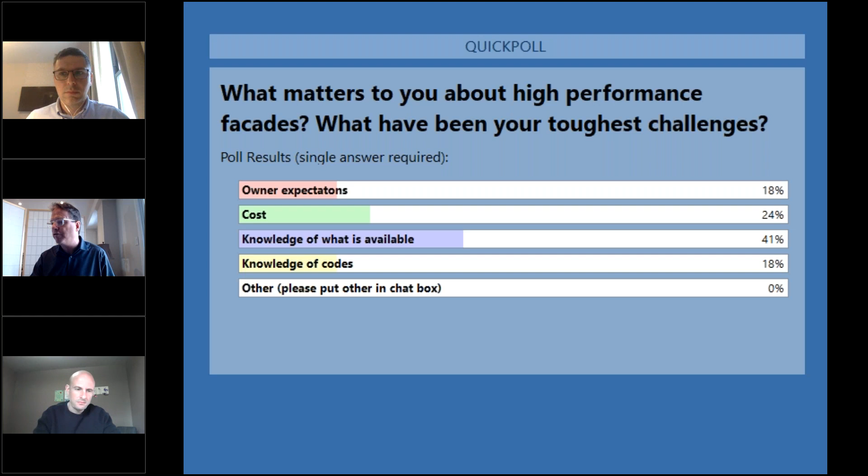18% knowledge of codes. And we're thinking in the future we might have a session about the codes. So think about that, and we'd be happy to receive your feedback on that topic later as well.

So with no further ado, I'm going to pull up Luiz's presentation, and does that show on the screen, guys? Yes, sir. Okay, great. Luiz, go ahead and just tell me when you want me to move the screen ahead. Perfect. Thank you, Blair. I'm just gonna turn off my camera. Okay, so next slide, please, Blair.

First of all, I just want to acknowledge that Passive House Canada acknowledges the ancestral and unceded territory of all Métis, Inuit, and First Nations people that call this land home.

Next slide, please, Blair. So as Blair introduced, my name is Luiz Bezerra. I'm a senior manager at Passive House Canada. I'm a certified Passive House designer, and I'm proud to say that I was the project manager of the first certified passive house in South America, in my hometown located in Brazil. So yeah, I'm Brazilian. Next slide, please, Blair.

Just to give you a quick introduction, who is Passive House Canada? We are a membership-based social enterprise that advocates for the high-performance international passive house standard. We do a lot of education and professional development and technical services, and our members, staff and structure are located all across Canada.

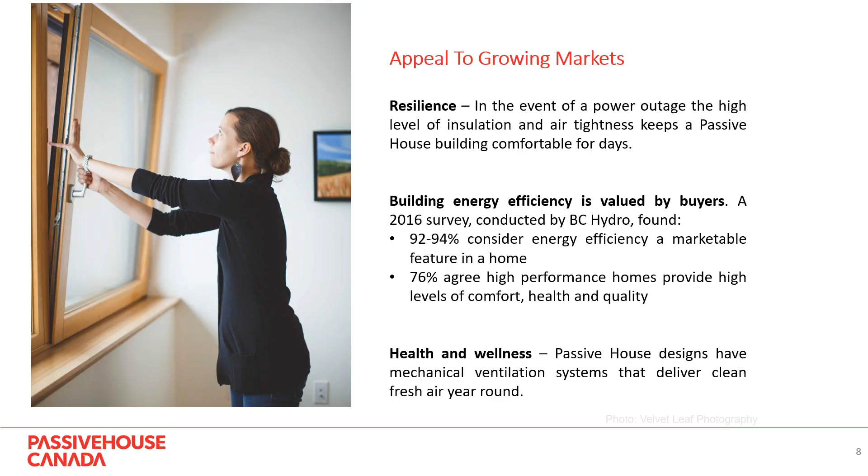So it's going to be hard for me to go in only 10 minutes to try to explain as much as I can about passive house. We do have a lot of education, as I mentioned before, but I'll just give you a high-level introduction to what is passive house. What do I need to know to build the passive house high-performance standard? Next slide, please, Blair.

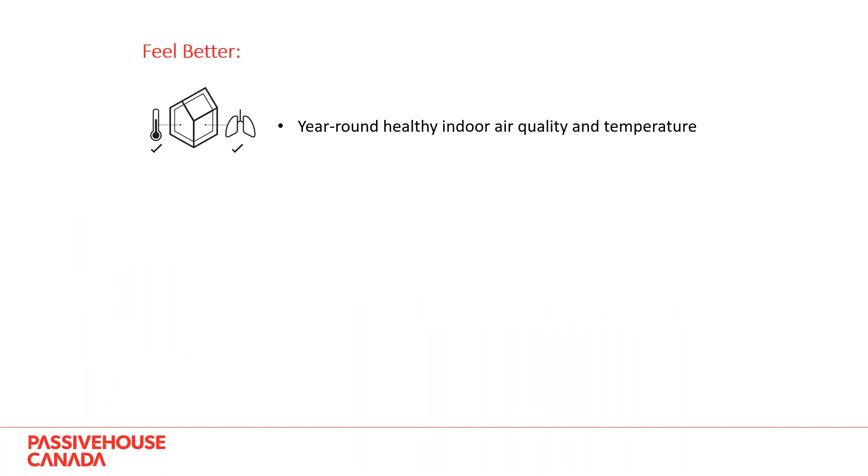You can click 5 times now. Thank you. So, feel better. This is one of our logos, to feel better, because what you have is year-round healthy indoor air quality and temperature. You're going to have your house always quiet and comfortable through the changing seasons. Substantial reduction in energy use and operating cost. On this one, I just want to note that depending on what code you're actually comparing to, you can have a 90% reduction on your costs.

It's very simple to use, and you have durable systems and priceless peace of mind, meaning that it doesn't matter if the government decides to put energy up or down, you're always going to have peace of mind that you're not going to be relying too much on that. Next slide, please.

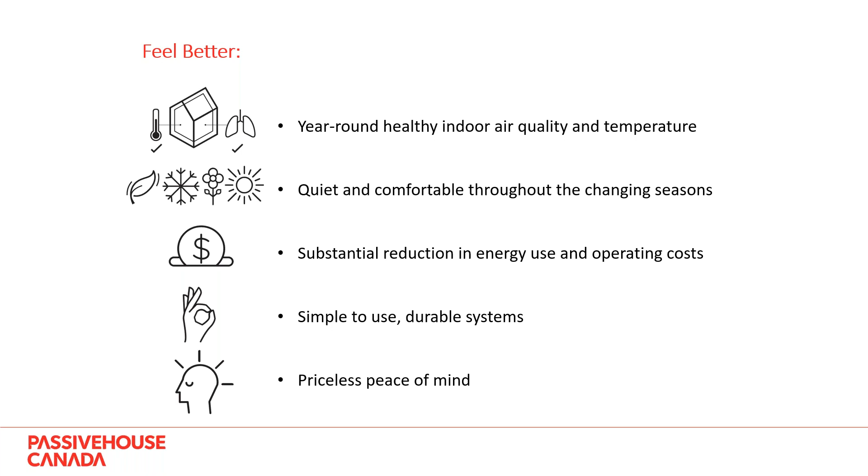So the passive house standard uses metrics. You might be asking yourself, what is the difference between passive house standard, LEED, and all the other green standards that you have so many of nowadays? What happens is passive house uses intensity metrics. It's very simple metrics to implement and compare, okay? And everything that you do has to go through the PHPP, which is the passive house planning package, where you energy model everything.

So just to give you a brief overview of what your targets are, you have to have an energy demand at most of 15 kilowatt hours per square meter per year on space heating demand. You have to have at the most 0.6 air changes per hour at 50 pascals, the airtightness, and you have the primary energy demand at 60 kilowatt hours per square meter per year. Next slide, please.

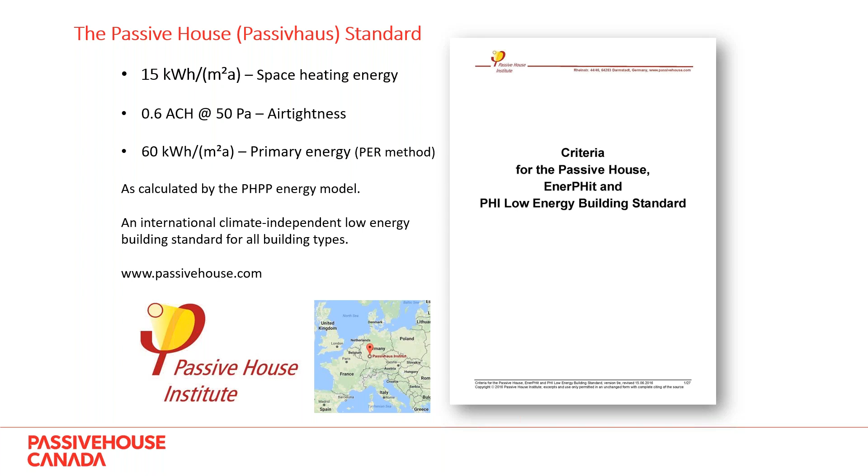So the key principles for you to be able to build a passive house are these ones in front of you. So we say that we have 5 pillars, right? Which is the super insulation. I like to say that super insulation would depend on the climate zone you are at. The second one is thermal bridge free design. You have to make sure that you don't have any undesirable thermal bridge in your buildings. You have to have high performance windows and facade, with good orientation. You have to have an airtight construction.

And with all that, you created a very insulated place. So for you to keep the air quality inside, you need a ventilation system with heat recovery. But there's a 6th one right there, which is form. So the design plays a huge deal when it comes to certification and making sure that you're going to be achieving the demand and the targets that passive house has. Next slide, please.

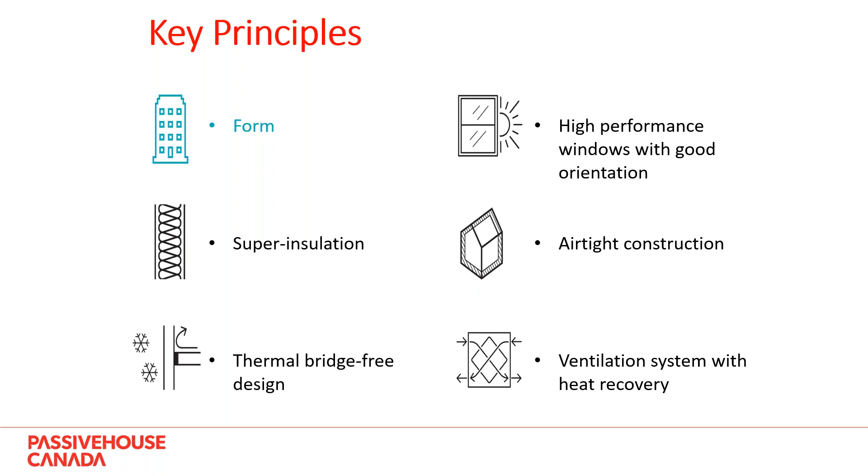So I'm going to talk briefly about the 5 pillars that I told you about. So you have to have continuous insulation. With that, you will reduce the heat losses in the winter, reduce the heat gains in the summer, and you're going to have a comfortable interior surface temperature. For some climates, R40 would work, but if you go to Alberta, Saskatchewan, Manitoba, the very cold climates in the north of Canada, you probably need a little bit more insulation.

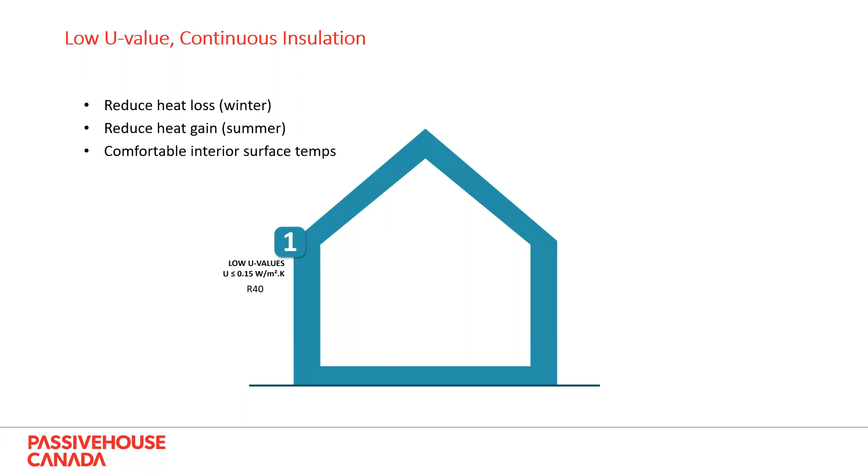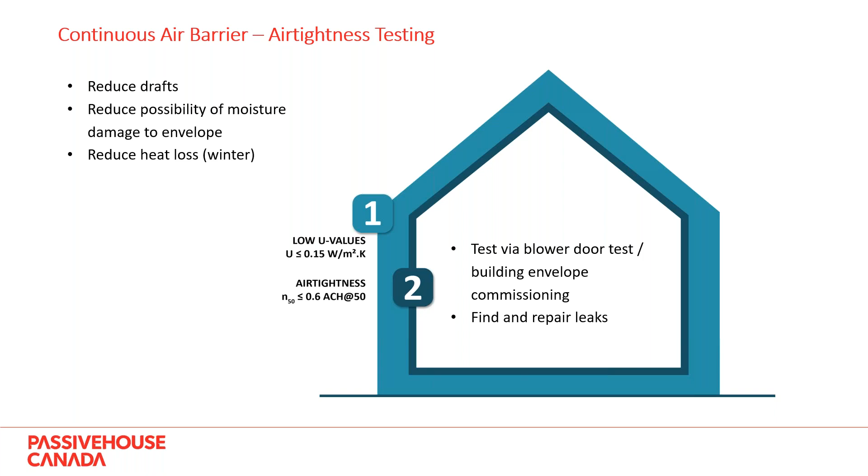Next slide, please. So the continuous air barriers, the air tightness testing: you reduce drafts, you reduce the possibility of moisture that damages your envelope, and you reduce the heat losses in the winter. So you also have a target. How you do it is you do a blower door test on the building envelope, and we normally encourage people to do 2 blower door tests, one in the middle of construction, because it's going to be easier for you to find the leakage and repair it, and the other one once the construction is over. So you make sure that you don't fail along the way.

Next slide, please. The third one is a thermal bridge free design. Thermal bridge, I don't know if you all know, but I'm pretty sure you do. A thermal bridge is where you're going to have undesirable heat losses that go through the materials, right? With a thermal bridge free design, you reduce the undesirable heat losses, and you have high interior surface temperature that prevents damage from condensation and mold.

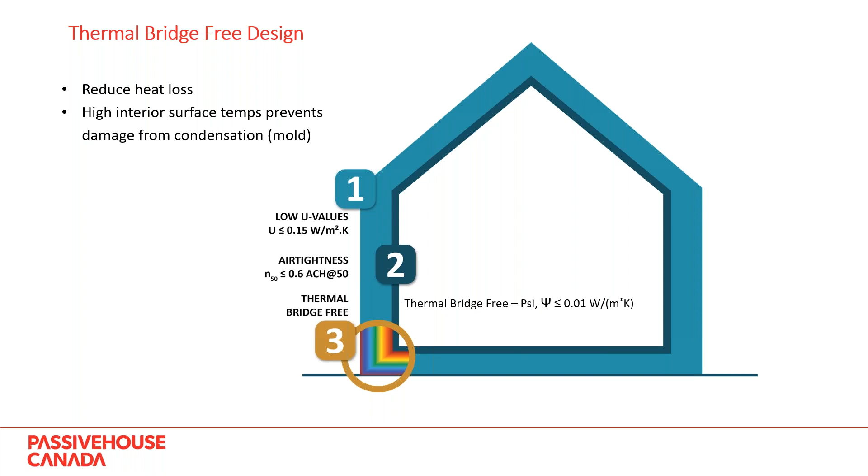I'm pretty sure that's the reason why you actually have the heater boards below your windows, because that's your weakest point, and that's where condensation actually happens, right? Because at 40% humidity, if the temperature goes below 15.6 degrees Celsius, that's where you start having condensation, and it can be due to thermal bridges or due to air leakage. Next slide, Blair, please.

And then you need to have high performance windows and facade systems. High performance windows add more energy to your home than they lose. Where we are in the northern hemisphere, you have to orient most of the windows south, so in the wintertime you capture the most heat that comes from the sun. If you're building in the southern hemisphere of the planet, you just flip, okay? And you also have high interior surface temperature that leads to increased occupant comfort.

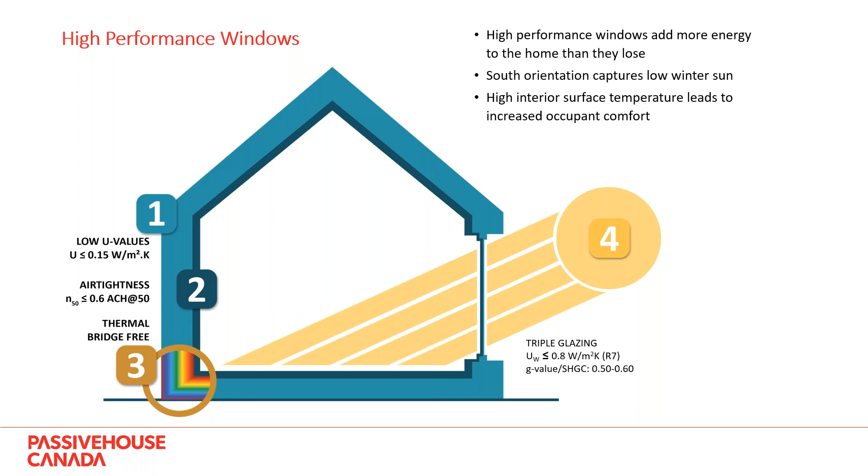Just so you know, in a passive house, you can only have a 2 degrees Celsius difference anywhere in the house. If you go near the windows of the facade, you can only go down 2 degrees from anywhere else in the room. That's the reason why you have this comfort, which is one of the key things that comes with a passive house. So you see that there is a number in there. The U value of the windows is 0.8. But again, as I mentioned before, this will change according to where you are. Next slide, Blair, please.

And on top of that, you need to make sure that you have clean air, right? So you put in mechanical ventilation with heat recovery. The heat recovery is just to make sure that you warm up the air that comes from outside with the air that you have inside your house. So you're going to need only a very little amount of energy. We're going to talk about this in the next slide. Sorry, Blair, can you go back a little bit?

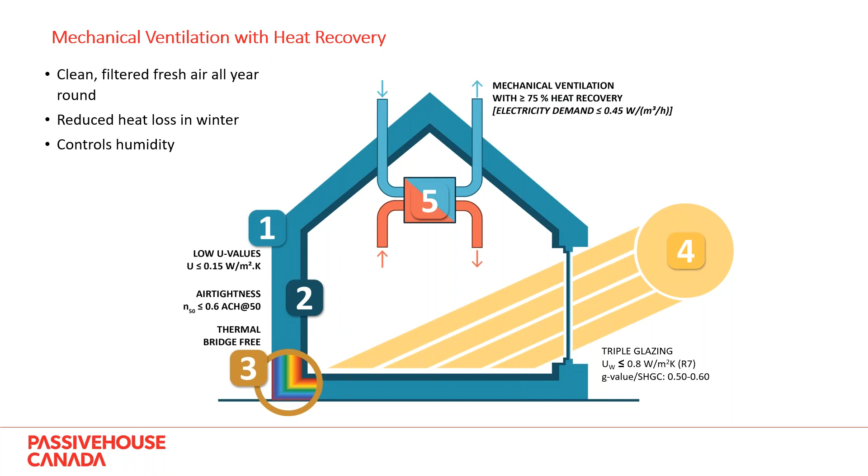With a mechanical ventilation system, you guarantee that you're going to have clean, filtered, fresh air all year round. You're going to reduce heat losses in the winter, and it controls your humidity. You have to make sure that your heat recovery has an efficiency higher than 75%.

Next slide, please, Blair. And as I mentioned, once you have all of this, you only need a little bit of heat. At Passive House we encourage using electric. So you can use many forms of any kind of post heating that you might need. But again, it will depend on the climate zone where you're at. And in a passive house, just FYI, you don't have to have your electric heater boards under your windows, because you have such good insulation and air tightness that they can be anywhere in the house.

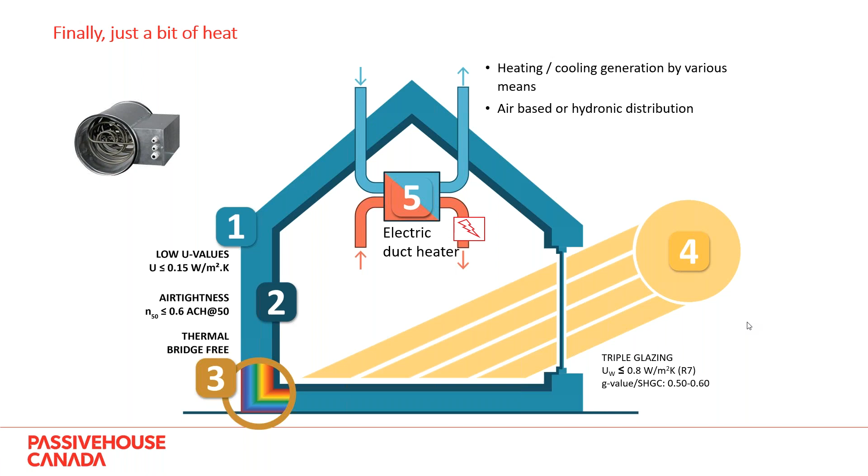Next slide, Blair, please. And finally, again, you can also use what we have a lot, the heat pumps that actually provide you cooling and heating as well. This is one of the things that right now we do need to have, even in a passive house. Don't get me wrong, due to the fact that the passive house standard allows you to go over 25 degrees Celsius for 10% of the year. We at Passive House Canada stress all of this, and we say that if you have an air source heat pump in your house, you're never going to get anything overheated, and you're going to need only a small one compared to any kind of code-built houses.

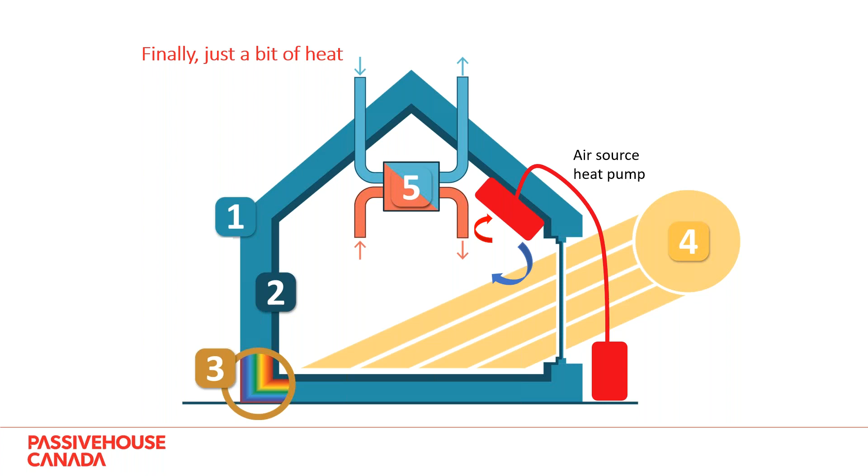Next slide, please, Blair. One of the things that I did not mention, passive house is a mistranslation. Passive house in German means passive buildings. So we're not talking about only single family homes. It can be in any kind of climate. The first passive house was built in 1990, and it's actually occupied since 1991. And we have data collected right now, and you can actually access it.

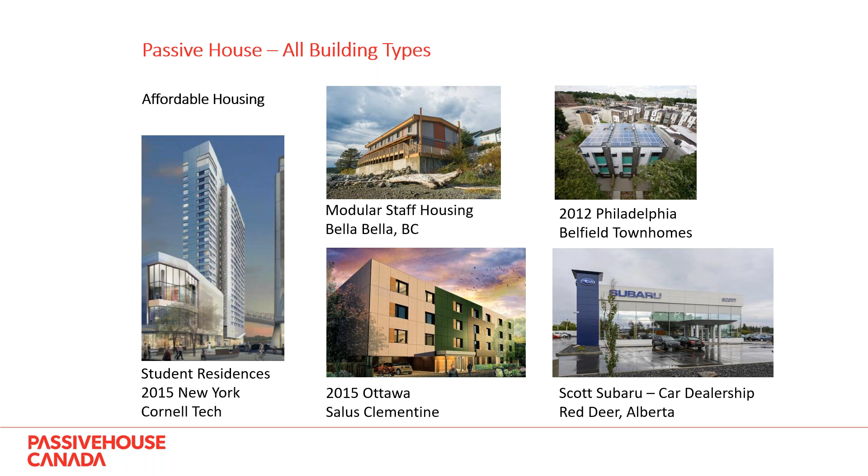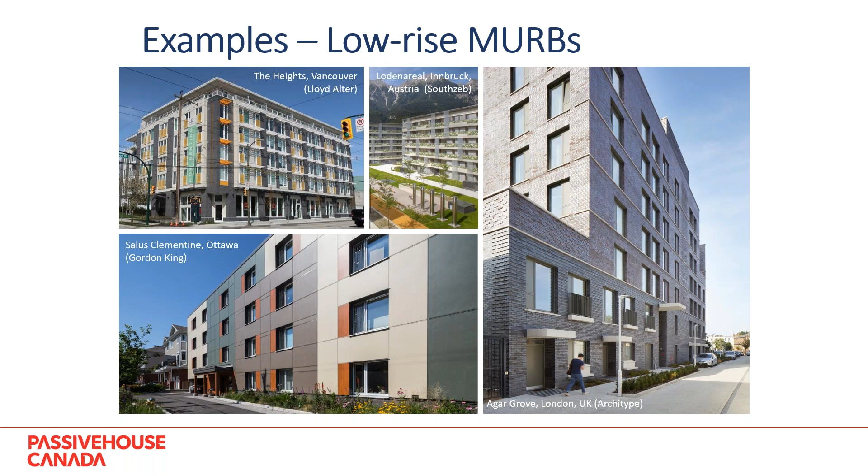More MURBs in BC and in Ottawa, in Austria. The one that you see on the left corner, this one is the first MURB certified to passive house. There are some lessons learned on this one, and we do also like to share all the lessons learned. I'm not going to go into the details because I only have 10 minutes, and I think I'm almost done. Next one, please, Blair.

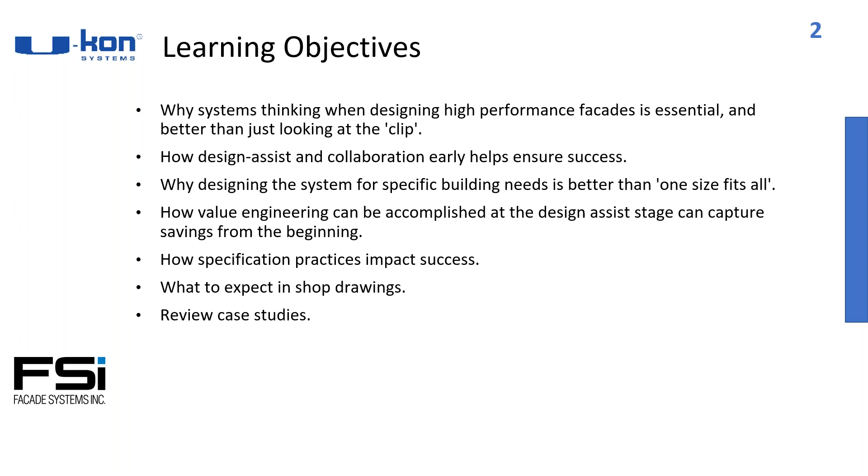And overall, what we're going to try to do is set some expectations about ways to approach it, but then also go all the way to building buildings. So that's a lot of content in a short period of time. So who are we. So we're into this for a reason, and maybe this sounds a little high and mighty or moralistic, but we are. And I was really pleased to meet Alex and learn more of what he does, because it fits nicely into my approach to the marketplace, which is try to leave it a little better than what it was when we got here.

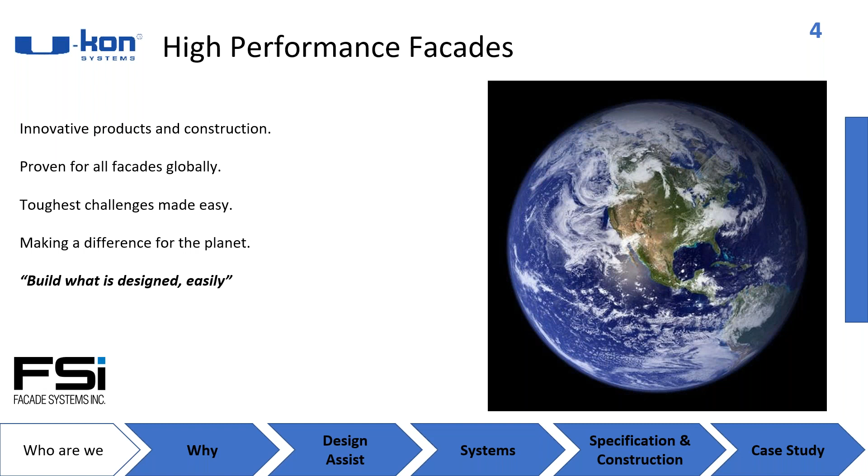I'm general manager of the company U-Kon Systems, and our company designs and produces ventilated facade systems. We're constantly working to improve our solutions and make them durable, simple, and cost effective. We provide support and consultation to the architect, the engineer, developer, and installers. And our main goal is to achieve the original design that was created within the budget.

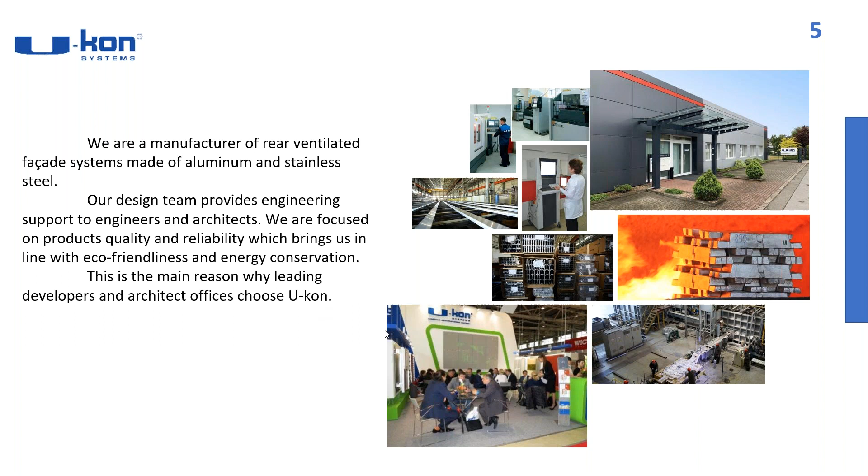So this is why today with Blair, we will discuss how we can achieve our goals, which factors we have to consider when we design the exterior facade, and why the system approach can help us to build high performance facade buildings. Yes, Blair? Next.

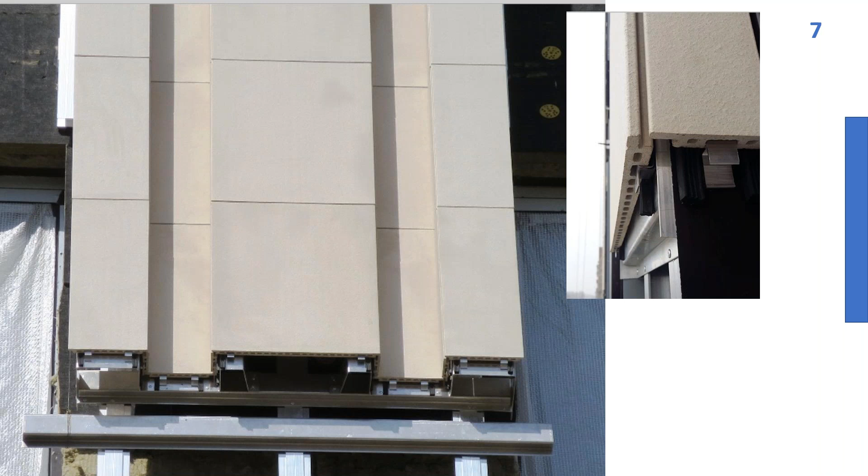And then, as part of my list of things I do, this is the line card at the moment, but I've put it together by simply listening to people about what they want and what they need. A lot of the time I get called in on projects and you're looking to fit some kind of goal, and I try my best to understand, learn and listen, and then maybe find other things that you need in order to meet your needs. So don't limit your thoughts to just that. There's a lot of different configurations and so forth. This is showing a custom terracotta, and it's a recladding approach to things.

I had a poll earlier, and I think it lined up with some of these things. We've achieved this list by simply calling folks, a lot of the folks in the building envelope engineering world, and the number one problem is building what's designed. They spend a lot of time up front modeling and doing engineering, etc., and then it goes out, and to some extent that loop is open. What gets built, unless you're sitting over the shoulder of the person building it, you don't really know. And there's some ambiguity in the other elements of the business in speccing and constructing.

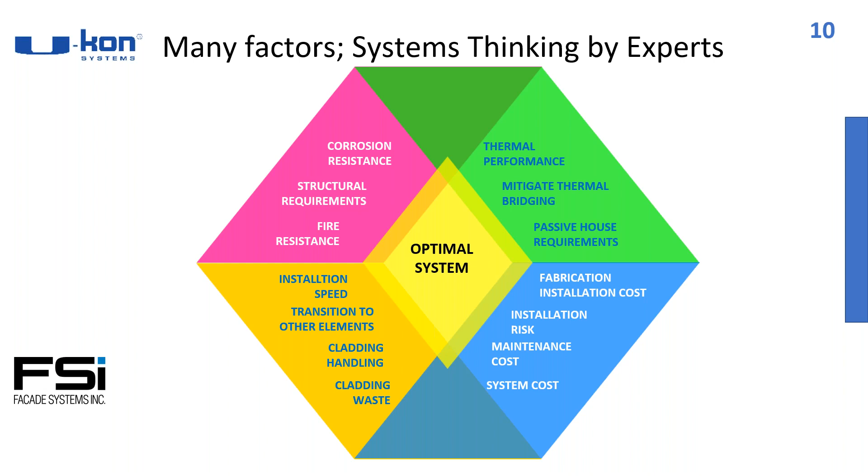And we were able to come back to them with a price that was higher for the whole subsystem, but in essence saved them a bundle on all these other items, making the whole system less expensive. Alex and I intend to write a document about optimal systems, and we're very interested to hear what your biggest challenges are.

Alex? Yes, Blair is right. So we have to consider a lot of different factors just to design for one type of cladding material. But on our buildings, we have at least 2 or 3 different types of cladding materials, which have their own requirements, for example, stone, brick, or fiber cement. Using a pre-engineered system can help us to increase design speed and make it simple to install. So in this case, we can specify one system.

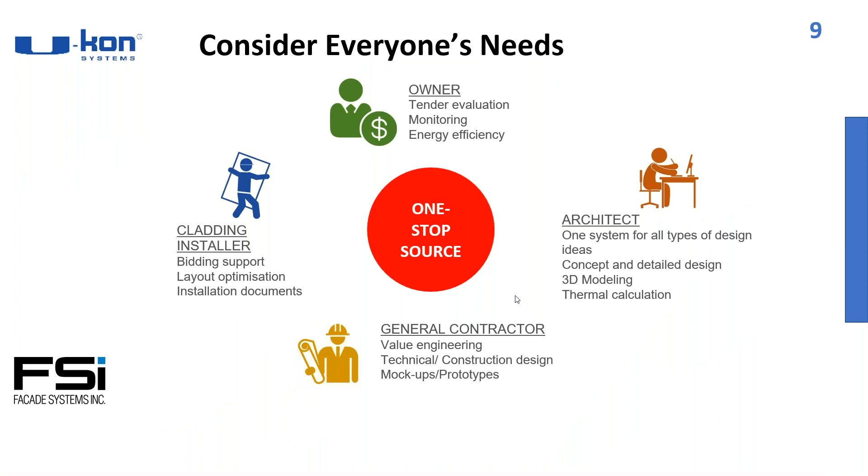Sorry. Can you go back? Yeah, it's okay. We can just specify one system for the entire project independently from the cladding material, and it's very true that many times we use the same substructure system with different cladding materials with different weights. On the next slide, you can see the project.

So can you go next slide?

So as I said before, our main goal is to build what is designed. The right thing to do is starting at the beginning, right? So we have to turn the concept into the building. The best thing to do is the initial review at the concept stage. At this stage, we can review some main structural requirements for our backup wall, cladding layout, how to make it more efficient, how we can reduce the waste, how we can better budget, etc.

I'm sorry. Blair, can you go to the next slide?

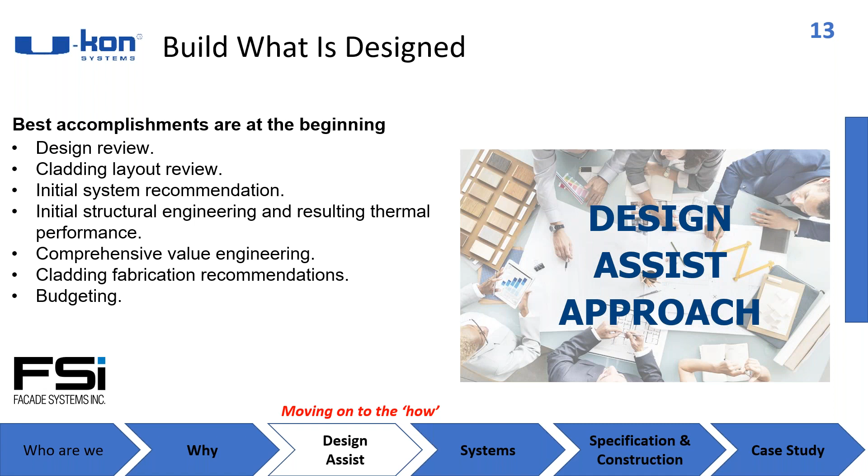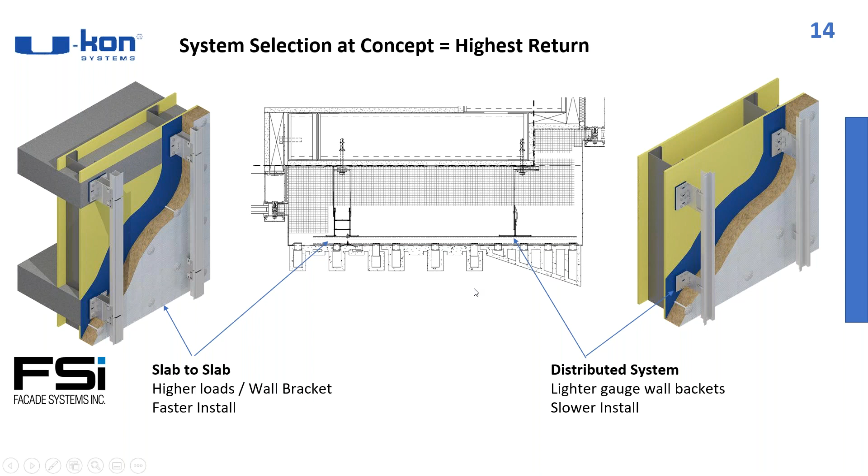Also, if we decided to use the same example, with preliminary calculation we can determine the thermal performance of the building, and see right away whether we can meet the thermal requirements of the original design. For example, we decided to use a less expensive solution, but because of the quantity and the layout of the wall brackets, that creates a lot of thermal bridging, and we cannot achieve our thermal performance goals. So in this case, we have to switch back to the solution that we used before, right? And we can go with the slab to slab solution because it has better thermal performance.

But imagine that we don't do any initial calculation and initial review of the design, and the general contractor decided to go ahead and use a 16 gauge steel stud for the wall brackets, and they already prepared the wall, and the architect and building envelope engineer received the shop drawings from the cladding installer, and they can see all the clip layout on the drawings. And when they check the thermal performance, the existing wall won't meet this thermal requirement. So what are we gonna do?

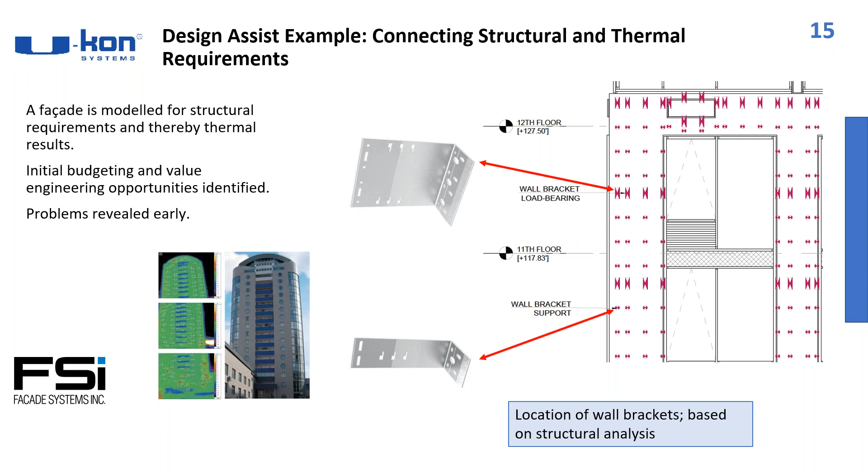Yes, so because we're reviewing the system, not just the wall brackets, we can also show here on the picture the individual components that are used to attach different types of material. And we also review them separately and then put them together as one system.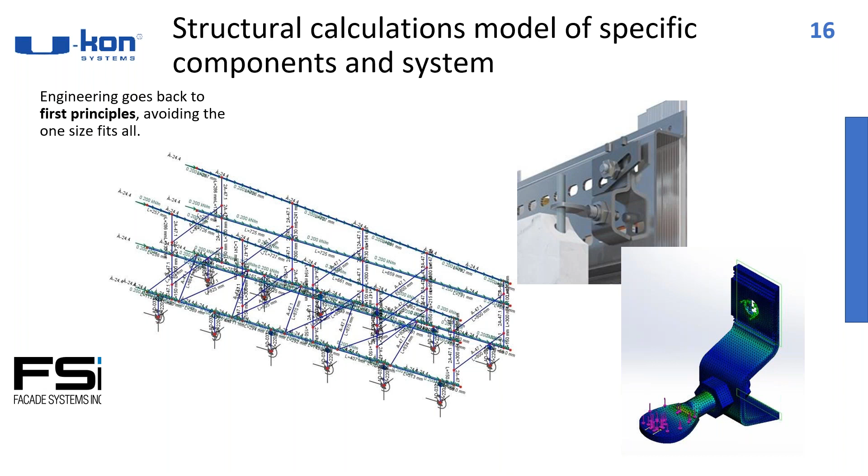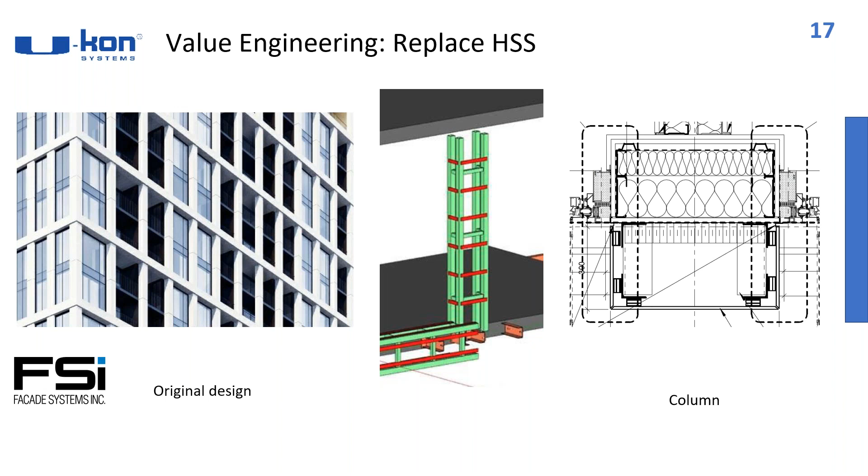And on another slide, you can see a great example that sometimes we can replace the HSS structure with our thermally broken substructure system. It can provide a lot of benefits such as cost, performance, durability, and being easy to fabricate on site. And on the other slide, you can see the picture of using the slab-to-slab solution made from stainless steel or aluminum and compared with the HSS system.

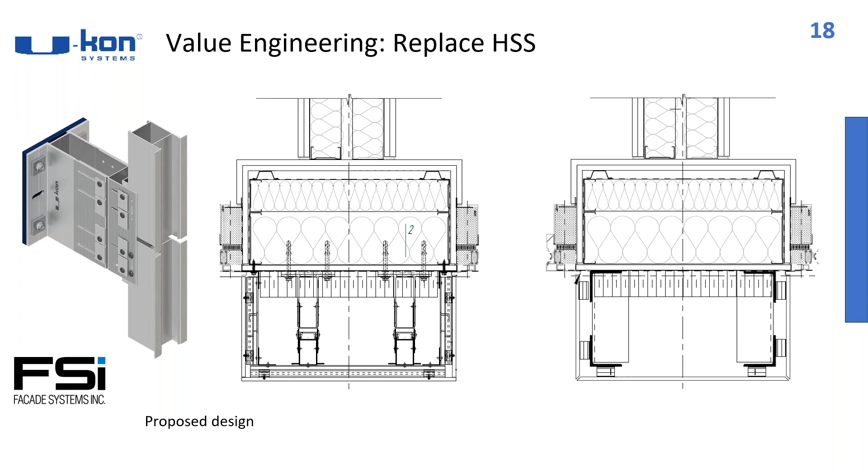Blair? So there's a lot in the last couple charts, but we want to dot some interesting designs as well. So this is actually putting high-rise stone in a thermally broken subsystem.

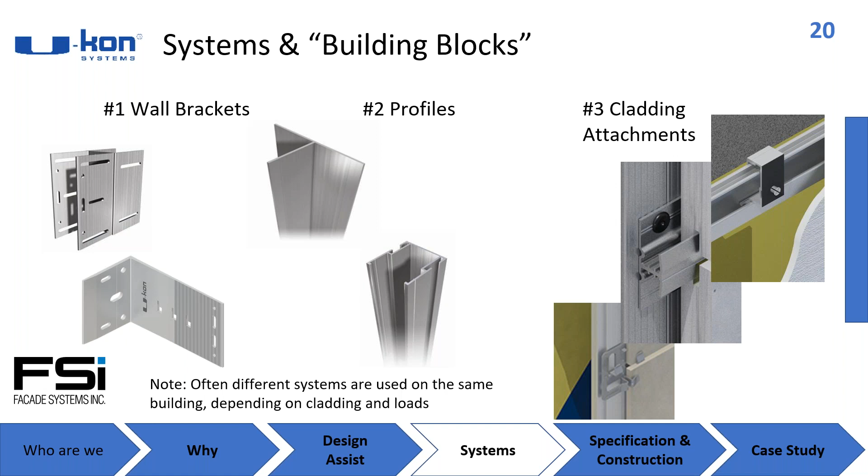So anyways, taking the systems thinking and breaking it down into building blocks. So on the left-hand side is a range of wall brackets. Some people call it a clip. We think it's more sophisticated to call it a wall bracket. We'll explain why. There's a range of profiles that are connected to those wall brackets, which again are structural, supporting the cladding system. And number 3 is the attachment to the actual cladding. In some cases, number 2 and 3 are combined, but in other cases they are not. And we're going to discuss them separately, simply because that's easier to get the point across.

Now, these are just some examples of wall brackets. And when you have, again, a toolkit of choices, a designer working with you can bring out the system that you want. So I was involved with a meeting this morning. They were asking for 11 inches of insulation. We're involved in a project in northern Manitoba. They want to have R50. And I would say the systems thinking is for anything north of about 6 inches of insulation and easily can be effective down at 4. If you're doing really thin stuff that probably doesn't even meet code, it kind of doesn't matter what you do, but anything that's going to start approaching a performing wall, then you need to start thinking about subsystems like these or wall brackets like these.

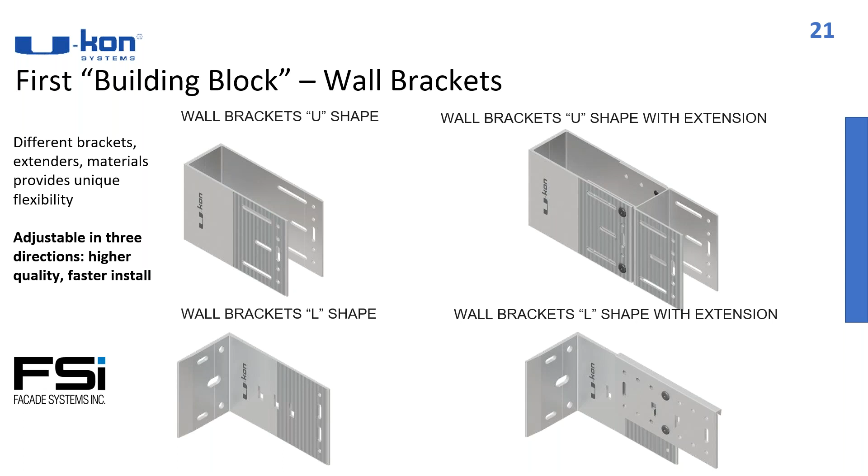And one of the questions we inevitably get for the one on the top layer is, does the insulation go into the middle? What we do there is we can cut a slit in the rock wool and slide the insulation around the wall bracket. And of course, it also works well with spray foam. And adjustability is a key factor.

Oh, I'm sorry, Alex, but I'll take this one. Okay. Sorry. Yeah, go ahead. Okay, so

You know, a lot of the systems out there, or even just components, allow a little bit of in and out, but that doesn't address all the problems on job sites. So I've been involved with a project or two where the framing wasn't done correctly. I don't know, have you? And I had to stand there and say to the general, you know, we can't accept that wall, and the framing is going to need to be done right before the cladding contractor can do his or her job.

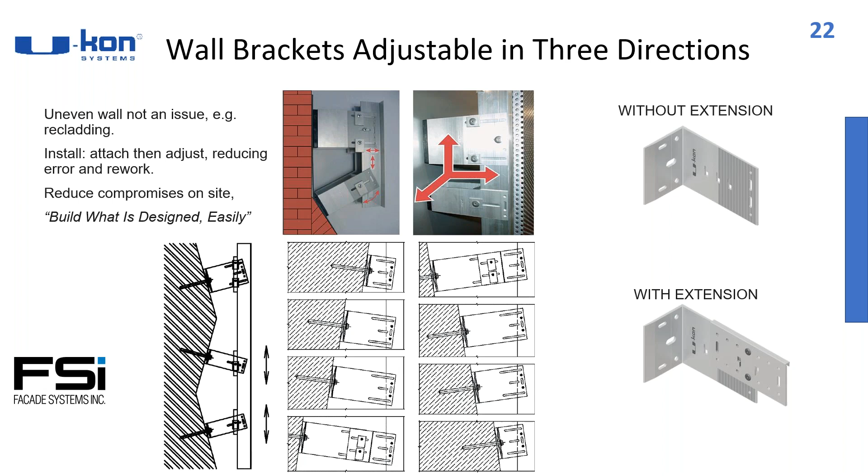When you have an adjustable system on all three dimensions, not only can you deal with the wall not being straight, you can also speed up construction because you can attach these wall brackets approximately where they're needed and then adjust them separately to make sure that the profiles and the rest of the system line up. So that three-way adjustability is something worth looking at when you're looking for systems. Alex.

Yeah, so we talked a lot today about the structural performance. Let's discuss a little bit the thermal performance of the wall brackets. We all know that different types of material have a different thermal conductivity, which plays a key role in thermal performance. With Morrison Hershfield, we did a thermal analysis where we compared the same design wall brackets, aluminum and stainless, with the same spacing, but made with different materials.

And we found out that with thicker insulation and the smallest vertical spacing between wall brackets, stainless steel brackets are about 30% more efficient than aluminum. But with insulation less than 4 inches and higher vertical spacing between the wall brackets, the difference between stainless and aluminum is not too big. It's just about 11%.

So in terms of the price, and depending on the performance of the building, we can make a decision: maybe use a less expensive aluminum wall bracket to achieve our thermal performance, or if we need a higher thermal performance, we definitely have to go with stainless steel wall brackets.

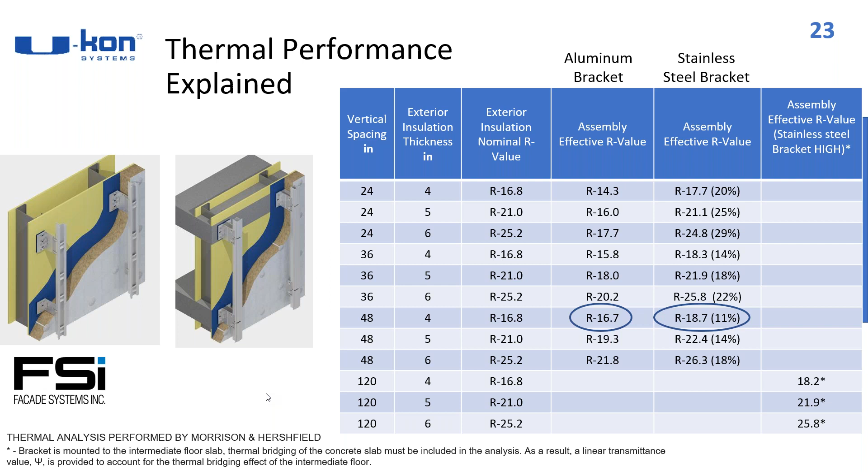Also, our wall brackets are Passive House certified. To make it an easy choice for designers and engineers, our company certifies our wall brackets according to Passive House requirements. It means that based on the climate zone and the weight of the cladding materials, you can certify your wall brackets, or as the Passive House Institute calls them, facade anchors, in different categories. It can be category C, B, A, and A+ as a component.

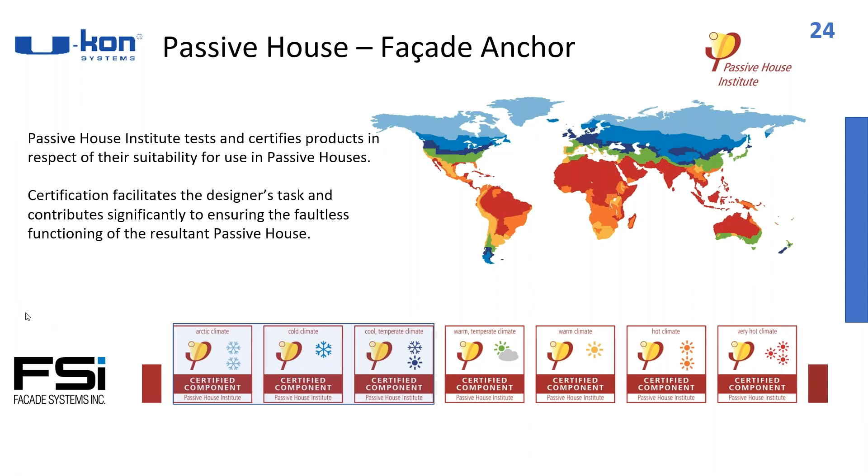The next slide gives a general idea of what you can find on the Passive House certificate, and I will try to make it a little bit simple and explain all these numbers. All manufacturers have to do the same thing as we do. We have one facade of the building where, based on the structural requirements from Passive House, we have to lay out all our wall brackets. We decided to do testing for the heaviest cladding, stone. So it means we have to install more clips on the wall.

Also, we picked the cool temperate climate, which is generally our southern border where most of the cities in Canada are located. According to this zone and the concrete wall, we have to use 240 millimeters of exterior insulation. So we use our wall brackets with at least 250 millimeters depth. And then we provide all this information.

And the Passive House Institute did their own structural thermal modeling and calculated the total thermal bridging effect, which is called delta U, and we achieved the number 0.0164, which qualifies as an advanced component because we have a delta U lower than 0.03.

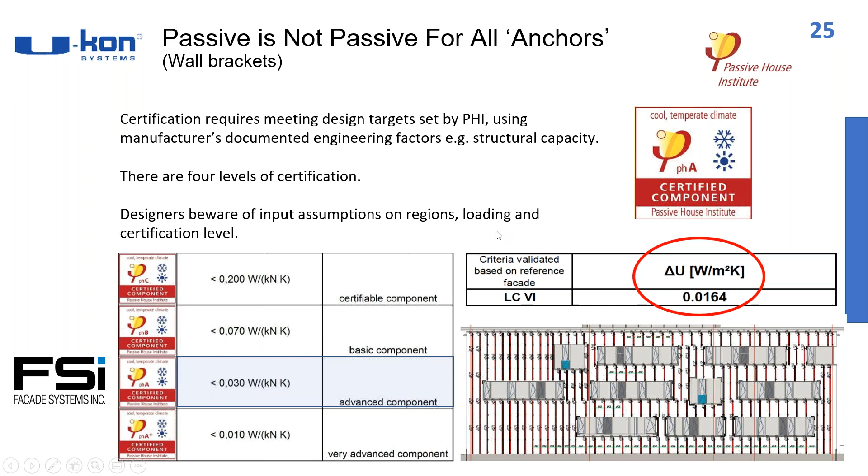Why do they matter? First of all, it's about the stiffness to support the cladding, and each cladding manufacturer gives you the deflection they require. The types of connections to the wall brackets also matter. If it's going to be slab to slab, obviously you're going to have a beefier profile to handle that kind of loading. And you do basic structural engineering that cladding engineers know how to do.

There is a relationship between the stud location and the panel location, and that has to be thought of while you're laying out a wall system. In some cases, depending on the panel, you need a whole lot of design freedom, if you will. In some cases, it's easy to line up with the studs.

And what you're looking for is a range of solutions, all the way from light, inexpensive ones to beefier ones. And if you think about it, you could have a light system down at grade and a heavier system up high where the wind loads are higher. And if you can get a mix of solutions for any given building, and that's the comment about having a bespoke system for a specific building, that's going to optimize performance, reduce cost, reduce structural issues, and speed up construction.

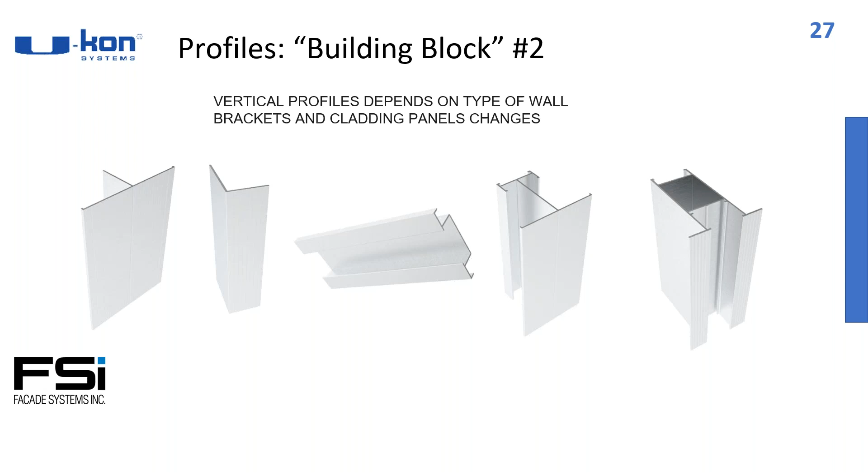Now, the relationship between the wall bracket and the profile is important to understand. So cladding systems move, substructures move, the building's moving, and so having the ability to have fixed and floating points in the connection between wall brackets and profiles is important. And that's how the system is designed. And basically, the cladding contractor kind of can't mess this up because of the way the products are configured.

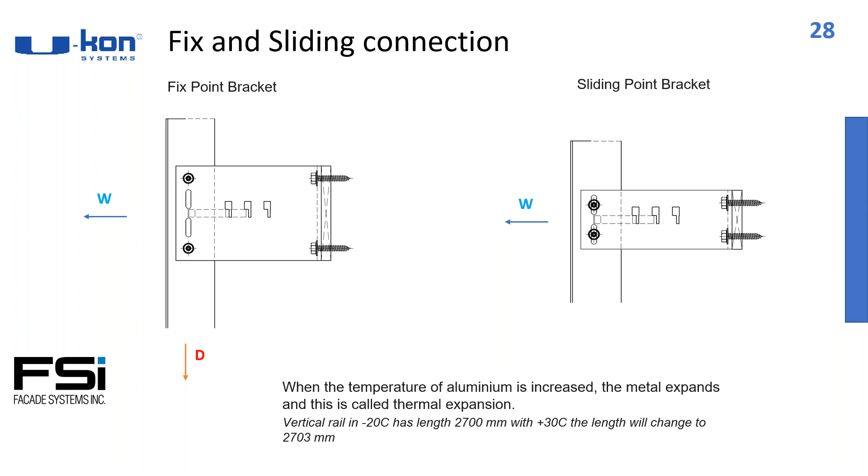Now, this is an interesting innovation too that when I started seeing this from U-Kon, I thought was very interesting. So let's say you have a limited amount of space to put on the wall bracket, maybe at a slab edge, therefore you want a large wall bracket, but you don't want to have two of them. So you can bring these profiles together, and with fixed and floating points, with a little bit of space between the profiles, you can allow for the expansion, contraction, and movement in the subsystem with only having one wall bracket.

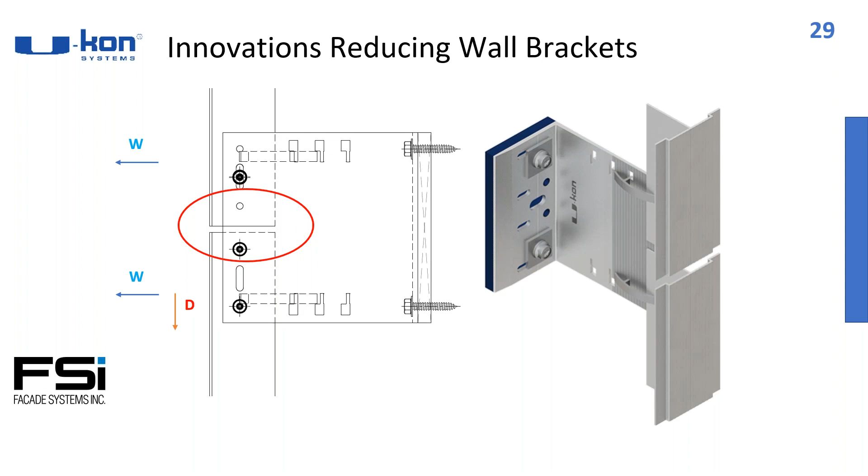Another innovation, we've hinted at it earlier, is connecting slab to slab. And this is really particularly good for speeding up construction and cost, et cetera. But also just think about the benefits of renovation. So if you were to take an existing building and you could put on a lot more insulation, possibly air vapor barriers, and then clad it without having to take walls apart and have the tenants leave the building, the ability to do a deep energy retrofit suddenly becomes much more effective.

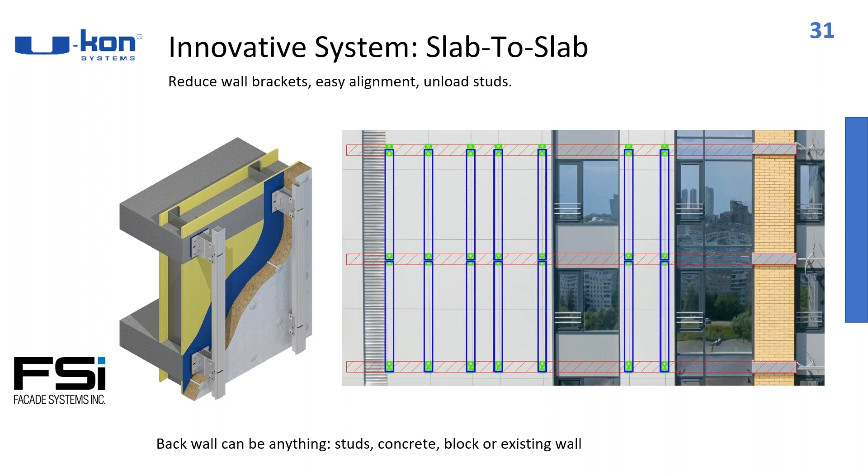So, this is a bit of a close-up, and there's a lot to this topic, and there's a way to design around all the windows, but we're just trying to make things simple. We would have the ability to connect wall brackets and profiles from slab edge to slab edge. Pretty obvious. So now you're taking what is 1, 2, 3, 4, 5, maybe times 2 is 10 wall brackets instead of what would have normally been something like 22. I'm pulling those numbers out of my head, but you can think about how many connections need to be made and how many connections have the potential of being wrong. So you may have to spend a little more money to have a more robust system, but you can speed up construction and improve the quality of the building.

This is another example of how different wall brackets are used for different parts of the building and still doing slab to slab. So on the right-hand side might be where the loads aren't as high or the cladding's lighter or you're down at lower parts of the building. And the one on the left with beefier wall brackets allows you to put it where the loads are a little higher.

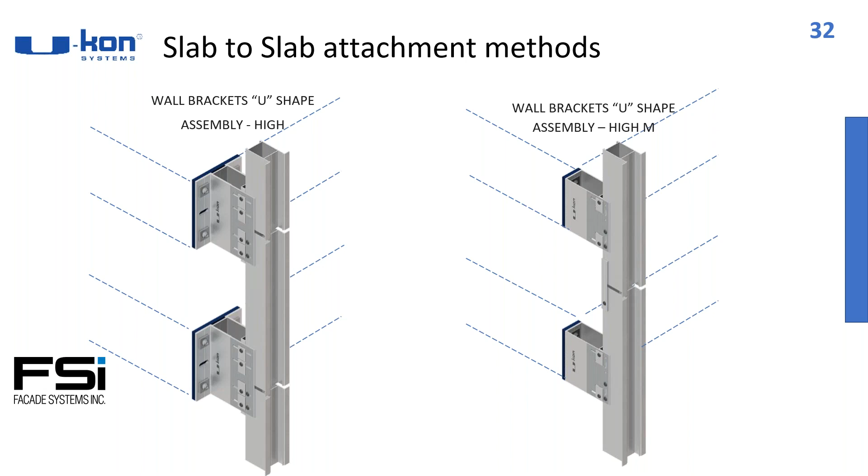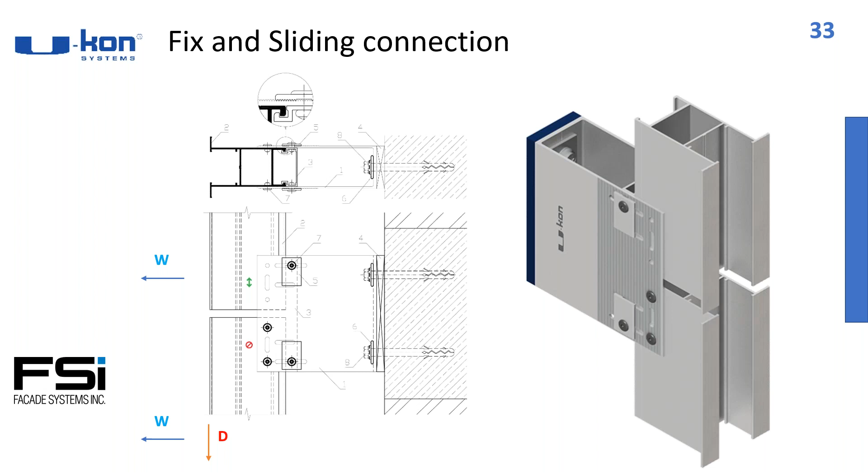And, cool building. Just to catch a breather here, doing ventilated facade gives you a whole lot of freedom for the outer skin.

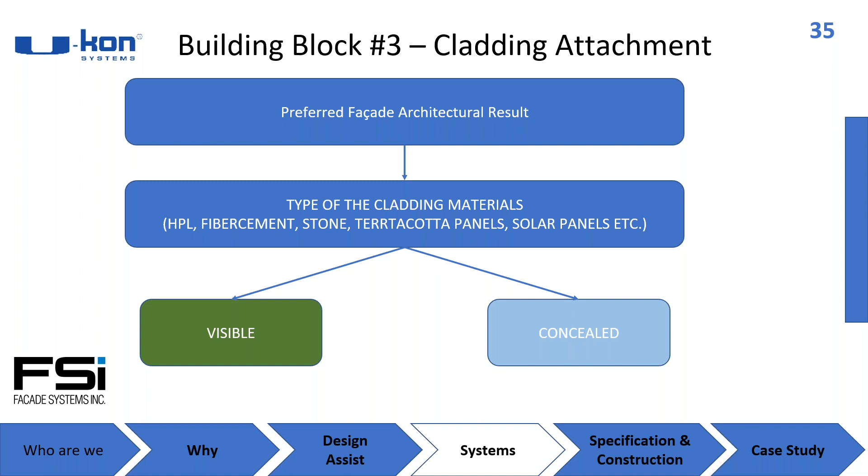So let's discuss a little bit the cladding attachments. As we know, we have a lot of different cladding materials, and also we can install them differently. And mostly we separate them into the visible attachment method and concealed. We're going to talk about both these methods very quickly and show what's the difference and some projects that were done with all of these different systems. Can you go to the next slide?

So this is the most common attachment system, using vertical T or L shaped profiles, or sometimes if necessary we use horizontal hat track or Z-bar profiles to attach any type of panels using rivets or screws. So it can be a fiber cement panel, metal panels, corrugated metal panels, HPL, anything. And yeah, it's very simple. You just have to lay out properly and then attach using the screws.

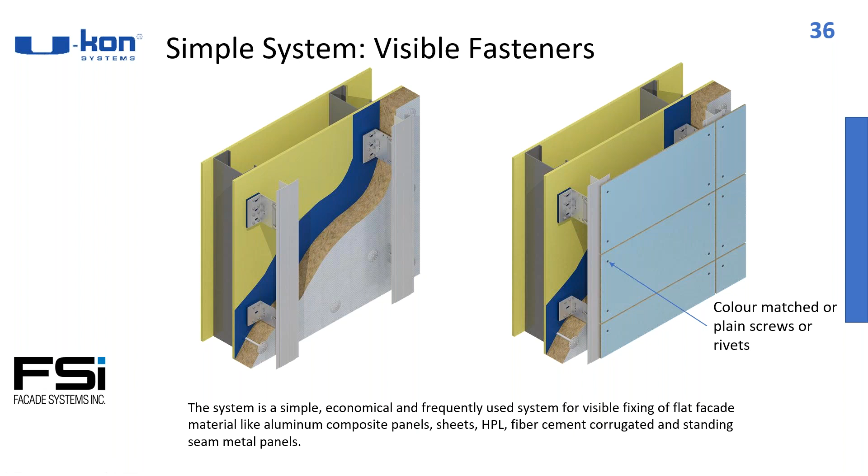Another solution that is also very common is using undercut anchors. So it's like a hidden clip system, concealed, so you cannot see any fasteners. There are a lot of companies that produce different anchors like Keil, Fischer, or Keepnut, and this system can be used with fiber cement, HPL panels, stone, porcelain, ceramic panel, anything you name it. It's very simple. We install the undercut anchors behind the panel with a small hanger clip, and then hang the entire panel on the horizontal rails.

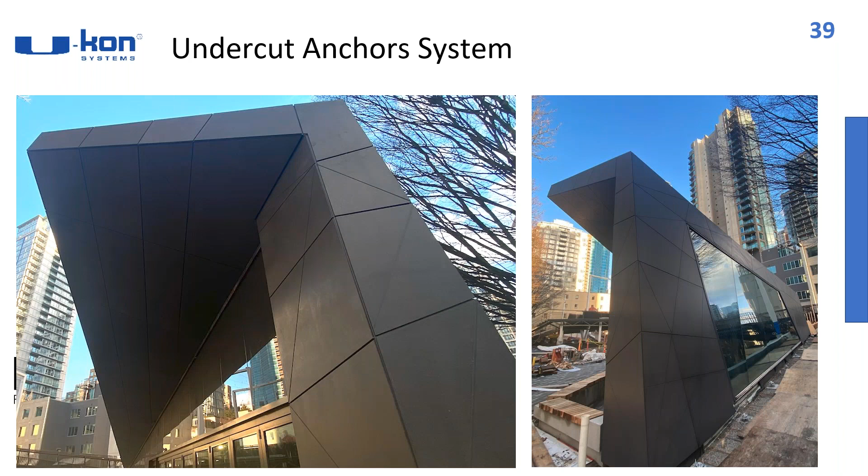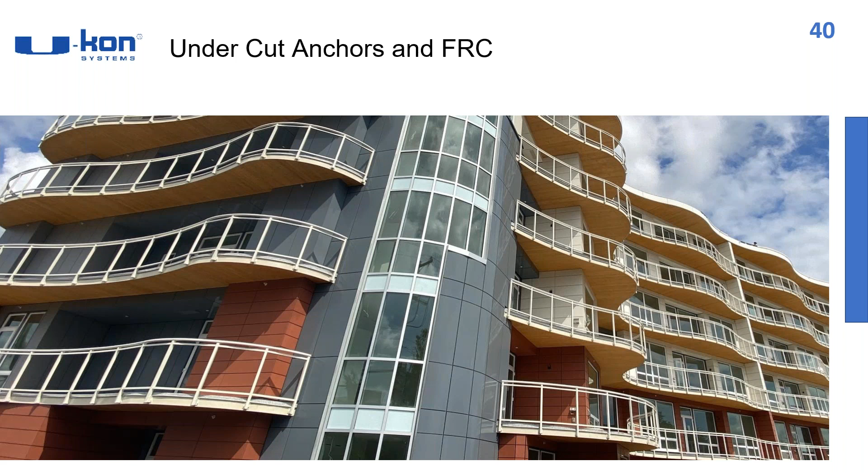And on the next slide, you can see an example of the fiber cement panels installed on a project in Vancouver. And another example of the red panels, these small tiny panels, the architect wanted to make them similar to terracotta and without any fasteners. So we use the same hidden clip system behind each small panel.

Another interesting solution to attach heavy facades like stone or thick ceramic panels is the kerf system. We use it mostly with stone when we have a top and bottom kerf on the edge of the stone, and again you have a starter bar, and then a middle regular horizontal profile that supports the stone, and in this system you can create any joint, between 3-4 millimeters up to 12 millimeters thick, very simple to install. But we have some limitations in terms of the size of the panel and the thickness of the stone. We can probably use a maximum of about 2.5 inch thickness of stone.

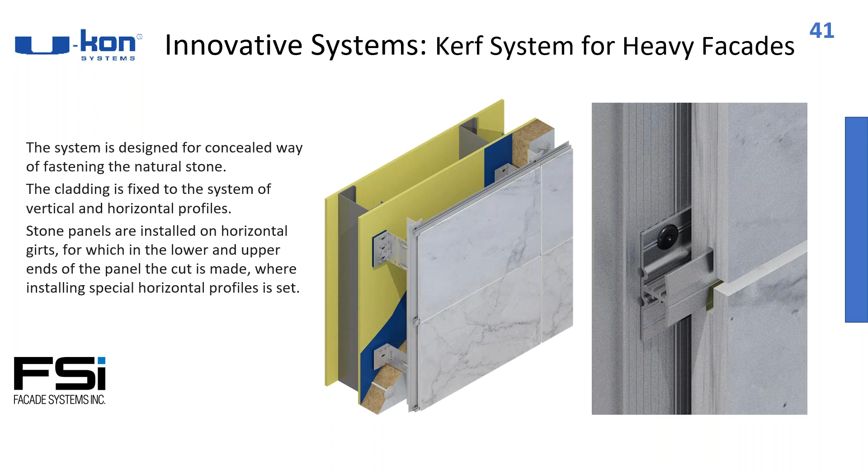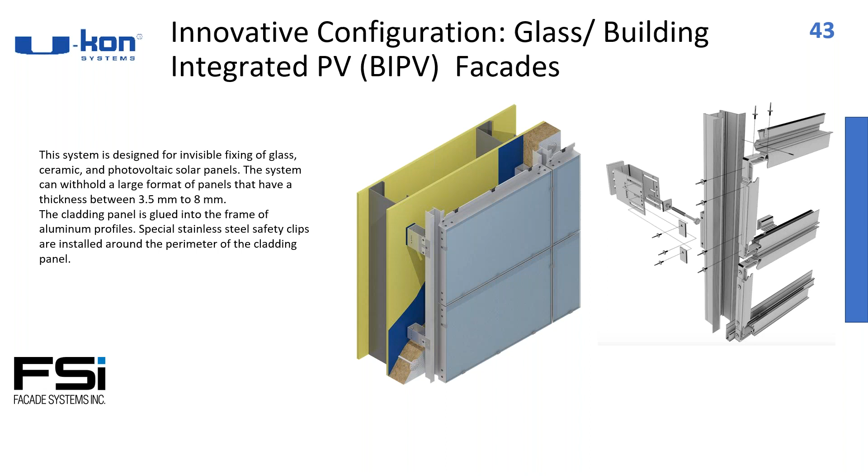This is what we talked about before. As a passive house, you have to design the form and arrange the building specifically. In this type of building the architect oriented the building to the south, so that all the solar panels can catch all the sun.

Can you go next? At the same time, we have solutions like thin brick veneer, for example Corium or Smart Clinker, which creates a horizontal rail and helps us install individual clinker veneers separately. The nice thing about that is you get exactly the same look as a full-size brick, but the system is lighter. It means you have fewer brackets, so you can make a better thermal performance building. Can you go next?

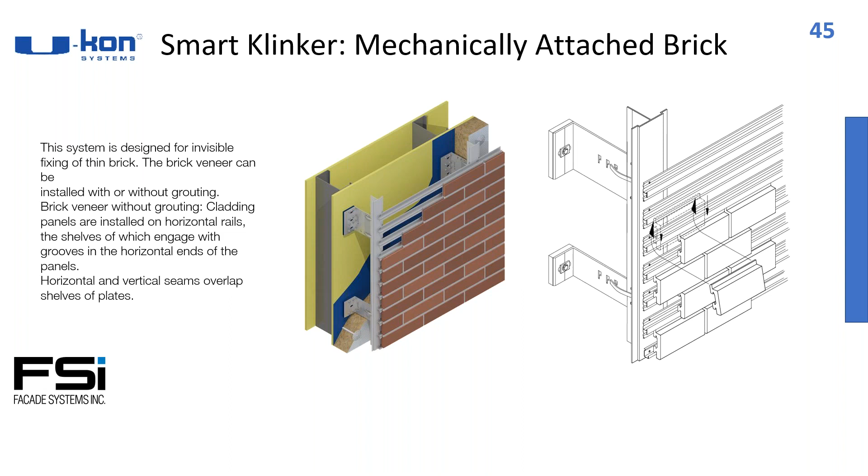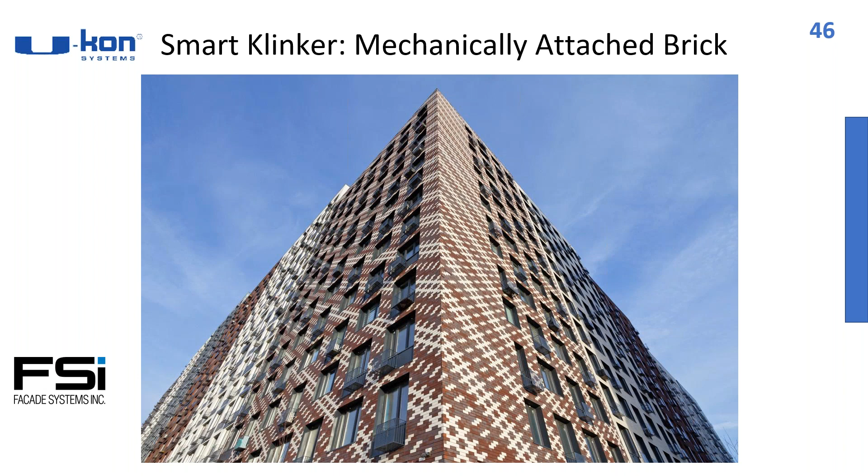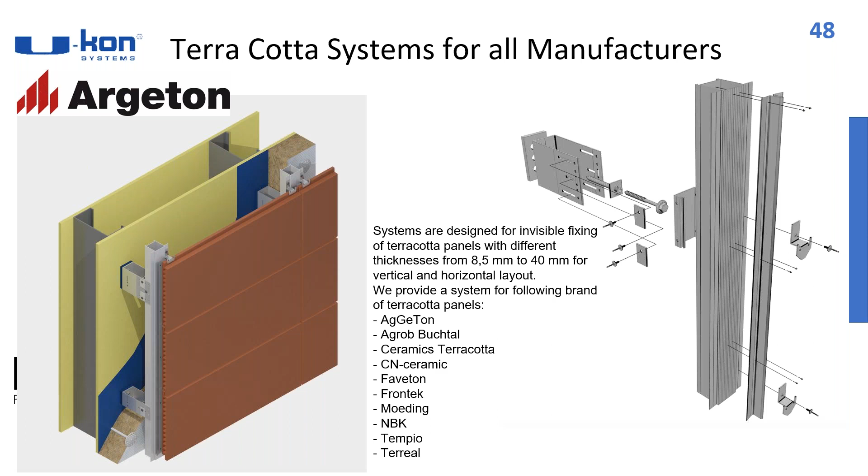On the next slide, you can see this solution for terracotta panels. There are a lot of manufacturers who produce terracotta, for example Agrob Buchtal, and we have a solution to attach these panels horizontally or vertically. It doesn't matter. We just have to change some profiles and clips a little. And on the next several pages, you can see some examples where some manufacturers can even produce curved terracotta panels, so if you want to achieve curved surfaces, it's possible to do.

Blair, next. Yeah, this is an example with the terracotta panels. So I'm going to talk about specification for a moment, and I'll admit some guilt here. I was involved with writing some of the specs for Division 7 claddings almost 10 years ago, and I wrote in, you know, a paragraph or even a few lines about a clip, thinking that was the right way to do it. It's not.

Sometimes what you see is people writing in the depth of the clip. Sometimes you see that in the drawings, but it still doesn't say what's going to happen. There's nothing in there about inspections or how to accept review or expectations on shop drawings. And even recently, I read some specs where the clip was tied in with specs on the trims and the bird screens and the air vapor barrier. So not good, old, not the right way. And I'll explain that in a moment.

So what you're looking for, and I've had conversations with a number of the spec writers, is to pull that paragraph or two out and create a new subsystem spec. And that can be used for the entire building, because he showed you some examples where you had metal panel and fiber cement, for example, and why wouldn't you have one subsystem? In that, you can be very specific about the vendors. I'll talk about that in a moment.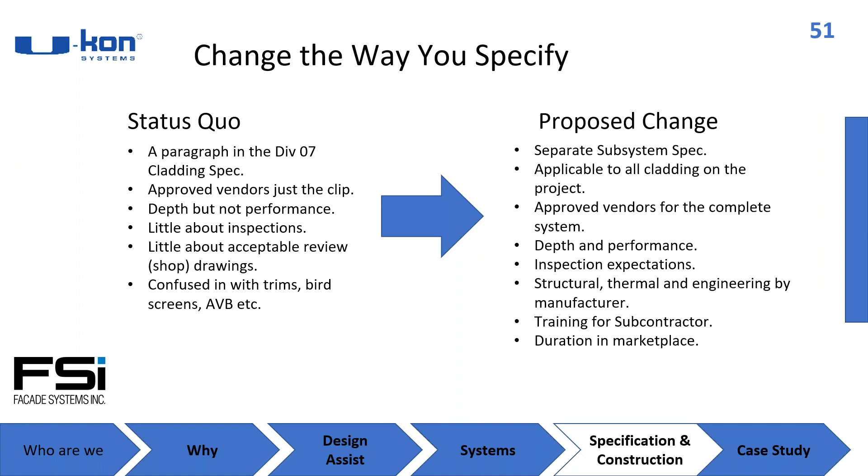And this third last comment is this tight connection between structural and thermal engineering. That doesn't get done. I've talked to a number of building envelope engineers that do their work up front, and then when it gets on the building, they don't know. And it doesn't come back to them in order to do a full thermal analysis after the structural engineering was done by the contractor. So the spec that we recommend is that the structural and thermal work be done by the manufacturer.

And to try to make the point, this is the length of our spec. And as I mentioned at the very beginning of the presentation, of course, we're telling you that we're the right people to work with, but I also recommend a couple things. I just picked a few things out of the spec, and you can read it, and you'll see the depth and comprehensive aspect of this specification.

So I got 3 ideas for you. One is, of course, love those U-Kon FSI people, take their spec and run with it. Okay, sounds good. Probably not the way you have to service your clients, though. So the next 2 would be add in vendors who can do this systems thinking, do engineering, do thermal work. And we do have competitors, and you can put approved vendors in this list.

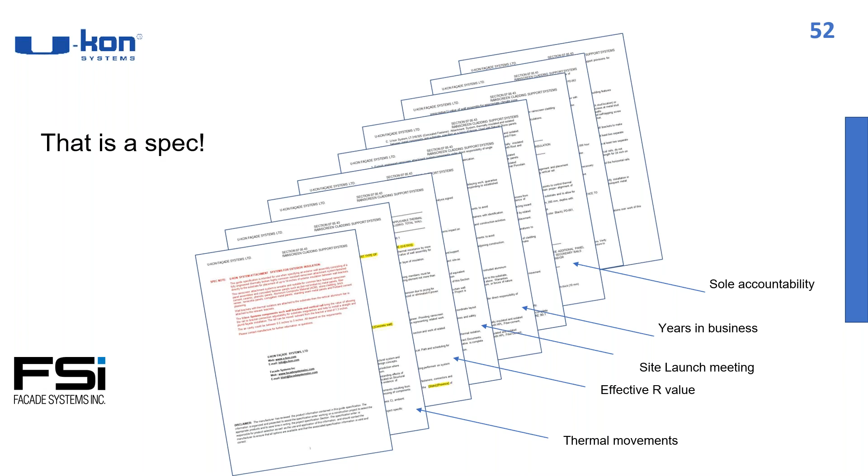Or you can make it a performance-based spec and put no vendors in, and you can use this as a template, add things, subtract things, in essence, put it out as a comprehensive spec that everybody needs to meet. So 1, work with us directly, 2, add on approved vendors, or 3, take everybody out. And frankly, we'll work with you on that whole design assist approach, whatever idea you have for the spec.

And then post-award, these are the kinds of things that should be the standard, and this is the expectation that you should have when things go forward. That's the purpose of having this in the spec too. So you should be reviewing drawings that came directly from your model. The contractors should be getting your model, and then their drawings should link to the model. The design in both the components and its performance should come from that model. It should be a comprehensive approach.

We recommend, especially on any kind of building that has some complexity, that a mock-up support system be built on the job site or possibly separately, so that everybody knows what they're going to get and what the expectation is on building the system out. And it's at that stage any risks and overages potentially get talked about. Maybe there's parts of the building that have access issues. Well, that's the time to bring those up and satisfy them. And maybe that happens even through the walkthrough at the bid process.

Now, the expectations for the contractor, this is probably beyond what is the current status quo. So some of my friends in the contractor world maybe won't be happy with me directing this approach to things. But again, the shop drawings should directly come from the architect's model. They shouldn't come from the last project's shop drawings. And that comprehensive link is going to make sure that the building's actually going to do what it was designed for. The fabrication support, so laying out holes and anchors and cut sizes, should come from that comprehensive approach to things.

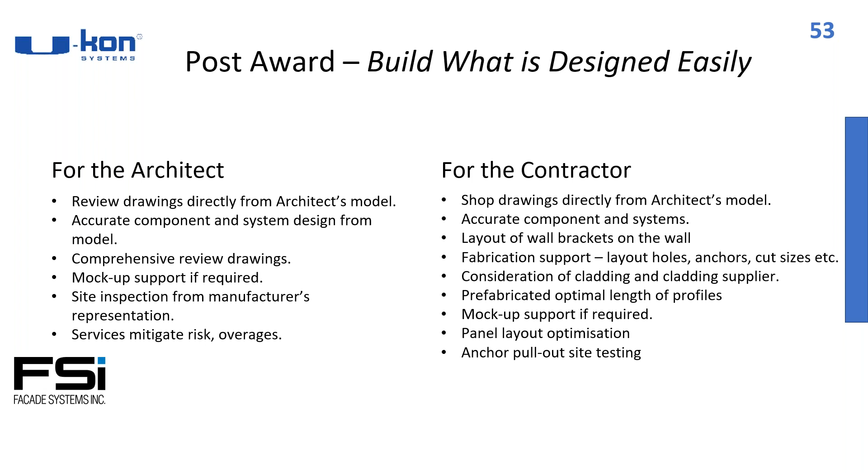And then Alex is going to tell you about a nice little job to explain some of the points we're discussing today.

Alex? One sec, my microphone was off.

So I just want to explain very quickly what we've done here. We received a call from an excavation company that was doing a pump station, and they were looking for the cladding and the system to attach. And we said, yeah, we can design. So we designed the whole system, and this guy started looking for the installer. And because this job was too small, they couldn't find anyone, and we said, okay, we can help you.

We just provide you the whole set of shop drawings with the layout of the wall brackets, the rails, and also we can draw all the panels and the layout of the screws that we can send for prefab of all the panels. And when we'd done it, they bought the full-size panels, sent them to the fabricator who cut all the panels, and then they arrived on site. We sent all our materials on site, and they put it all together in about a week.

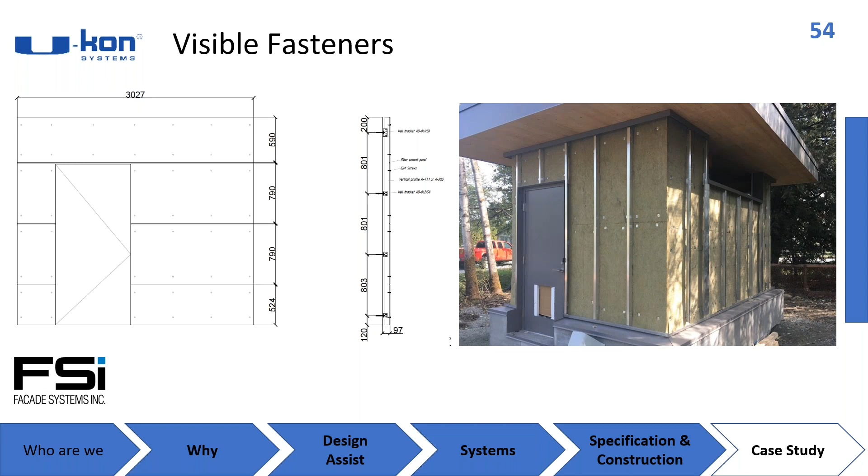And then on the next slide, you can see it's a very good job done by the excavation company, not a cladding installer. So what I'm trying to say is that having the proper set of shop drawings, we can help the installer get nice results in a short time, because they don't have to think about it. We thought about it beforehand and laid out all the clips and everything, and we can design all the details so they can just follow the drawings to install all the cladding materials.

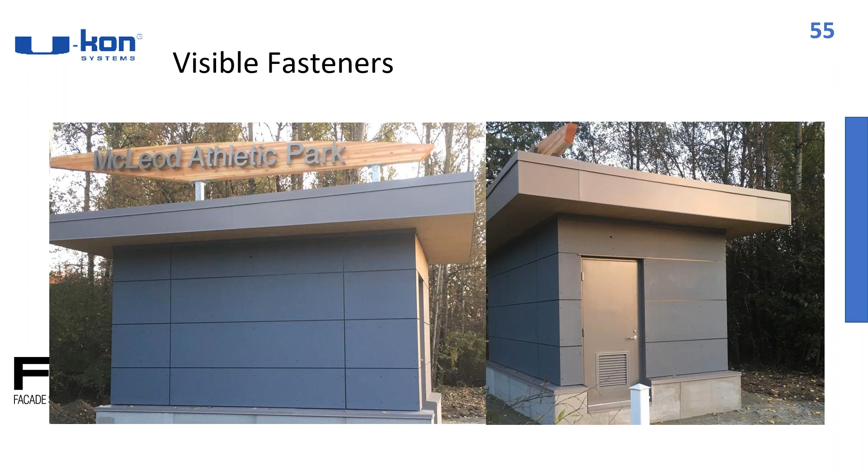So, what is next? We are intending to write an ebook on optimizing facades, and we'd love to hear about what your challenges are and things that you're curious about, so we could address those. So you could help guide us also on our next webinar.

So, our Facade Systems Inc. and U-Kon.ca, we will have our emails up in a moment. We're also happy to review a project. Maybe it's just a case of learning. It could be a project you've done already, or a project that's in the queue, to help you share some ideas under no obligation. We make the investment of getting up front with projects because we think it's the right way to do it, and frankly, it's a way for architects and owners to see what we can do.

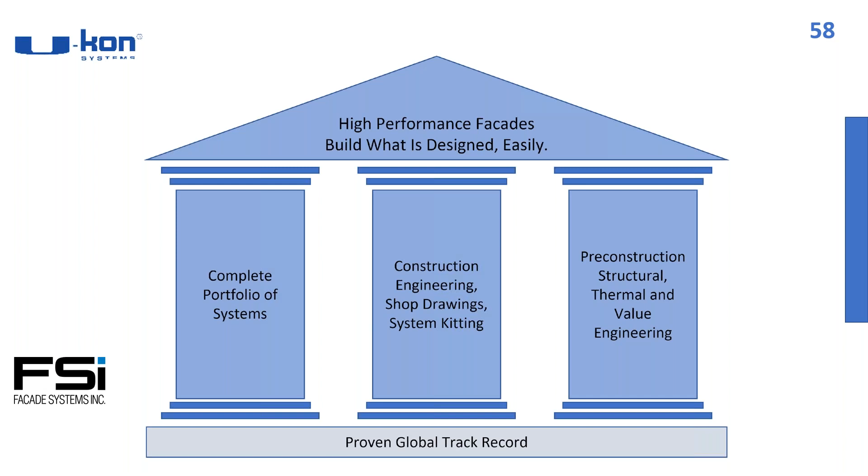Blair, do you want to share the shop drawings? Oh, geez, yeah, that's a good idea. I'll wait till this poll is done. I think what we're going to show you, everybody, if you can hang on, is some examples of shop drawings. Thanks, Alex, that was good. I'm just going to close that. I'll share that back in a moment. One moment, please. Okay, there you go, Alex. Tell me what page you want.

So this is an example of shop drawings for a project. Is it underway or has it been done? I think it's already finished, in the US. It's a small project, but it doesn't matter. We do all our shop drawings the same way. So if you can just quickly jump from page to page, I will quickly explain.

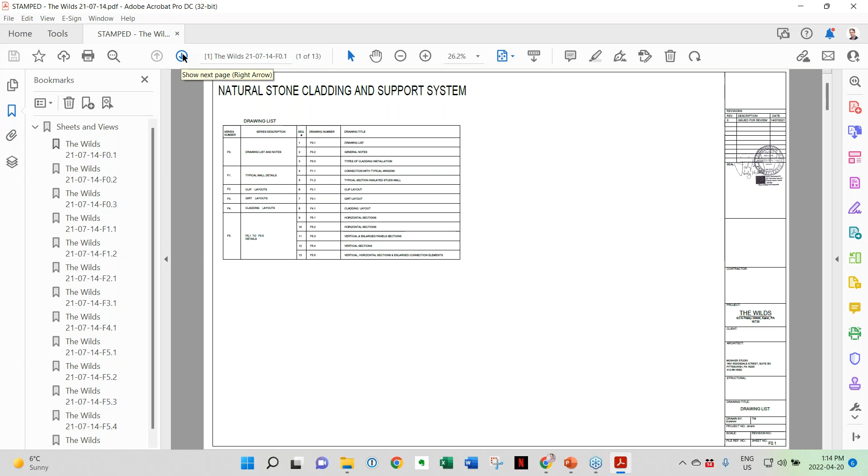So it shows a general idea of what cladding assembly we have on the project. On the next page we show the typical spacing of the wall brackets and how we have to attach them, what kind of attachment method we have to use, what kind of anchors. And on the next, can you go next?

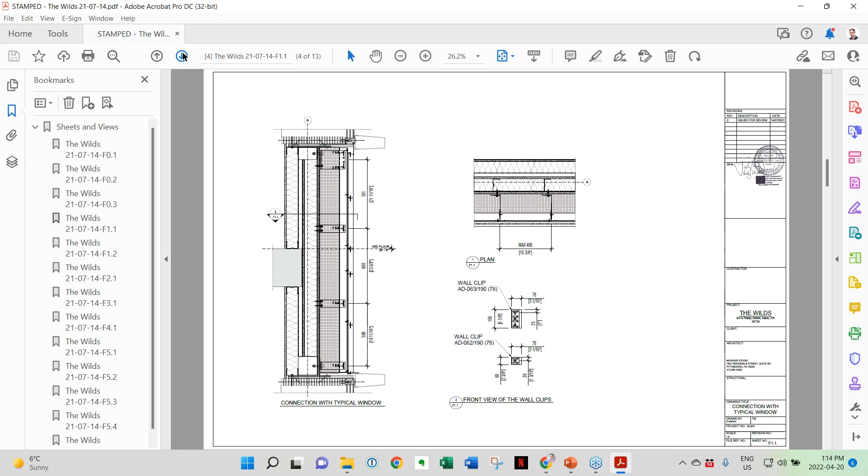And the same as here, so it's kind of a different anchor system. Actually, we use stone panels, which is 36 to 38 millimeters thickness, and we use a kind of approach slab to slab, which is almost 10 feet along the vertical rail. On the next, if you go next,

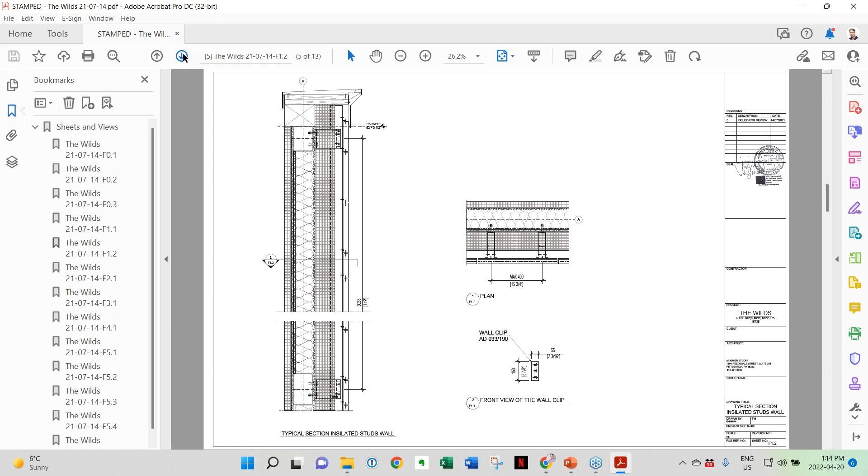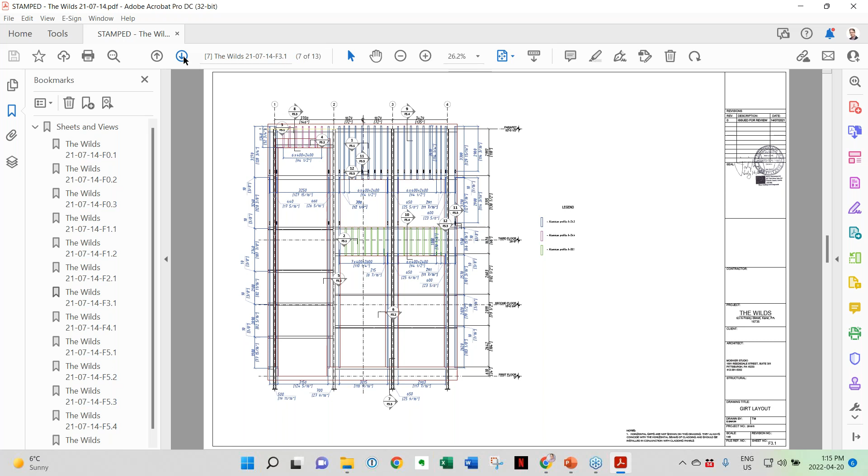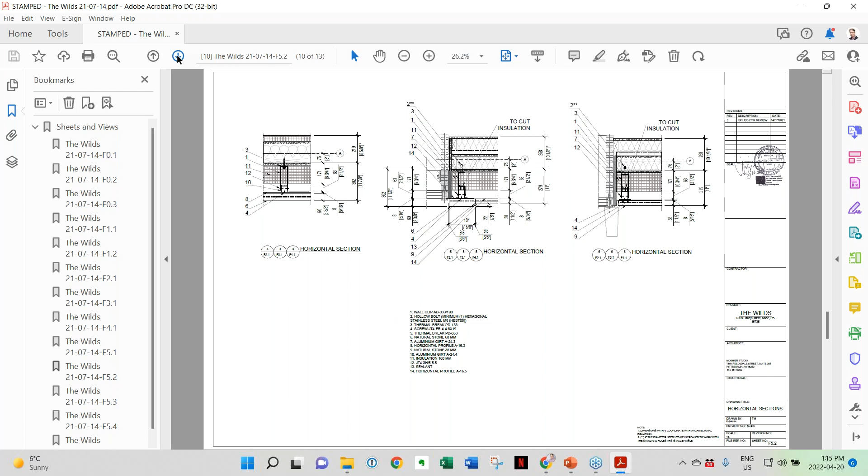And on the next page, we're showing the actual layout of all the cladding materials, like cladding panels. And then on the next several pages, we just show all the different details, like a plan view, section view, or how we can make some window detail, etc. So this is kind of our approach, to present all the information for the project so that it can help the architect and the installer design and build it faster, easy and simple. And also we can make some suggestions for the fabrication of the panels.

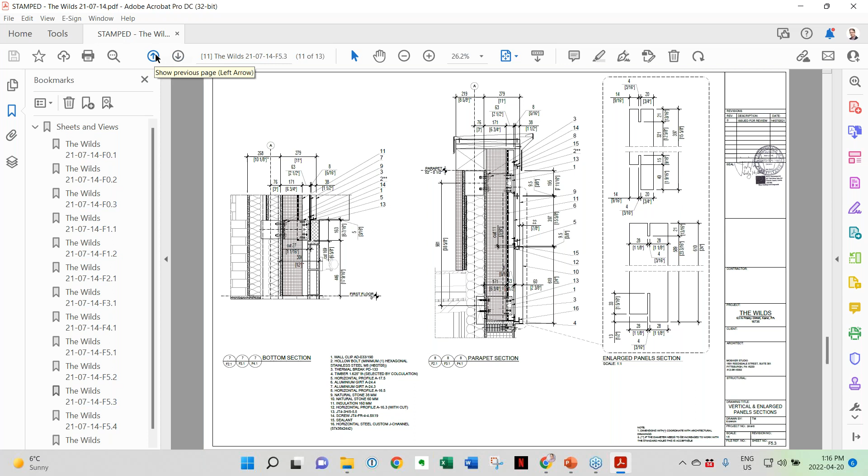Right. I don't know how many sets of shop drawings you have had, but 13 pages for a project of roughly that size is exceptional and comprehensive, and that's what we are talking about.